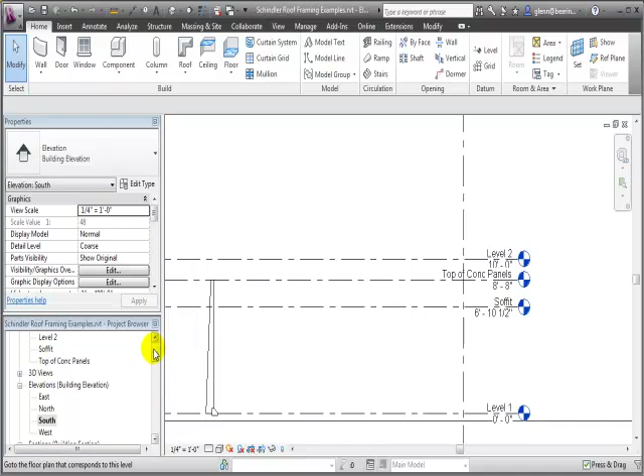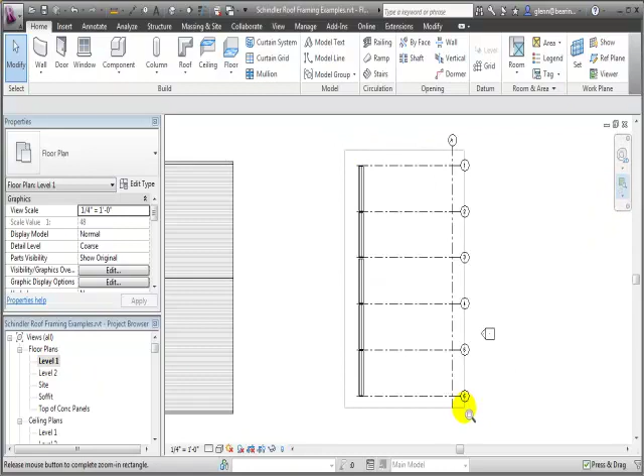If I switch back over to Revit and start placing some things, let's pop out to 3D for a second so you can see what we set up. We have a series of those Kings Road wall panels hanging out, waiting for us to go through and start putting some framing in there. If I start with that system and go to level 1, you'll see I've set up some grids that are matching the breaks in the wall panels, which would probably be a very typical thing for Schindler to have done - he really liked his grids.

To go through and create some of those basic beam elements, we could do things like put in some structural columns. For those structural columns, we don't have, by default, wood frame ones loaded - these are wide flange columns, steel columns. So what we'd probably have to do is load in some families.

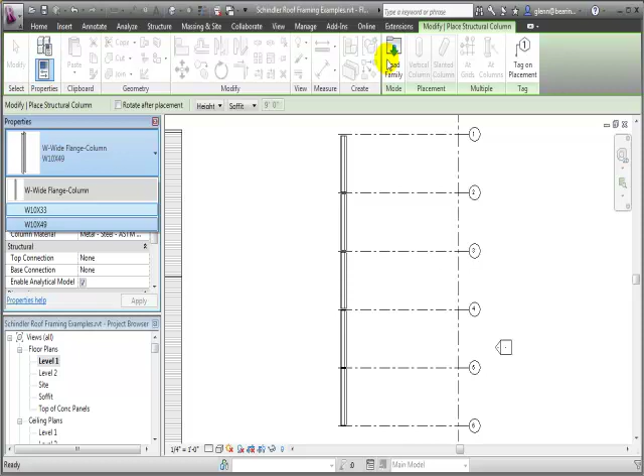If we go to the structural folder, and go to columns and open wood, we'll find some dimensional lumber. If we open that up, we can go through and choose some specific sizes we're interested in. In this case, we'll go for 3x8s, and maybe some 2x8s. Just collect as many different sizes as you think you're going to need.

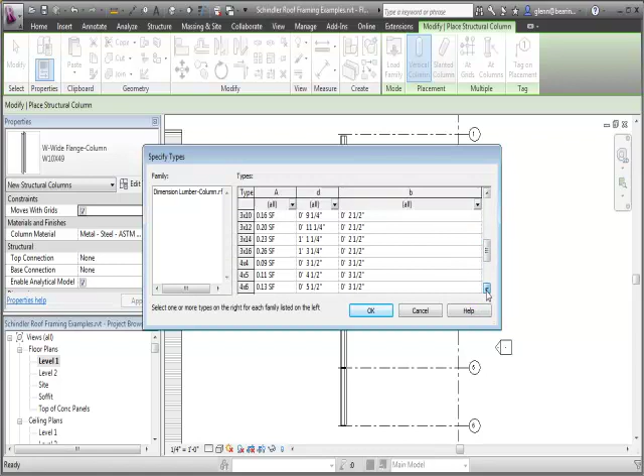I'll warn you about these. These are dimensional lumber sizes. What's going to happen is the lumber that Schindler was using looks like he was calling out explicit sizes as opposed to nominal sizes, so we might need to do a little bit of adjustment. We have these different column sizes available. If I open up the 3x8, you'll see it actually isn't 3x8 - it's really a more modern standard of nominal sizes.

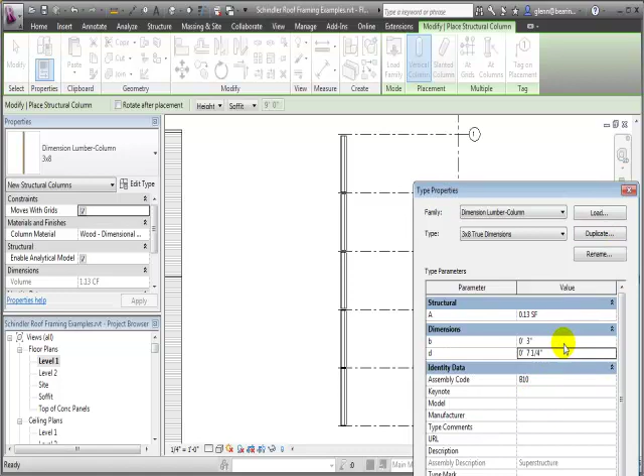So what I'll do is create a new one. I'm just going to call it 3x8 true dimensions, just so I could match what he was using at his time. So 0 foot 3 by 0 foot 8.

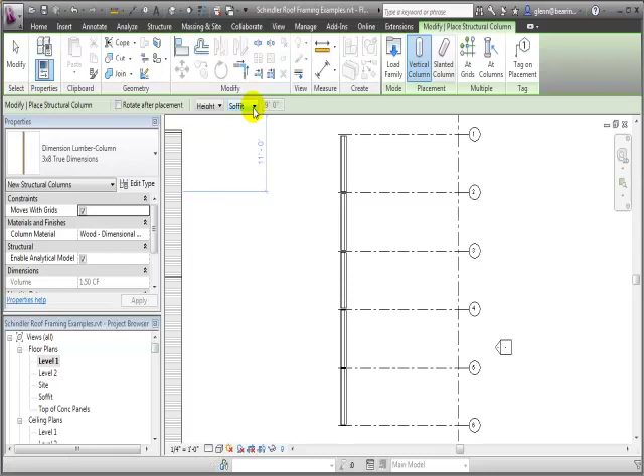Okay, we'll go ahead and place some of those different columns. Let's take a look at how you do that. We're going to place them from the bottom up, relative to level 1. It's going to fight with me a little bit over how high I can make them. Maybe I'll leave them to soffit right now and change that a little bit later.

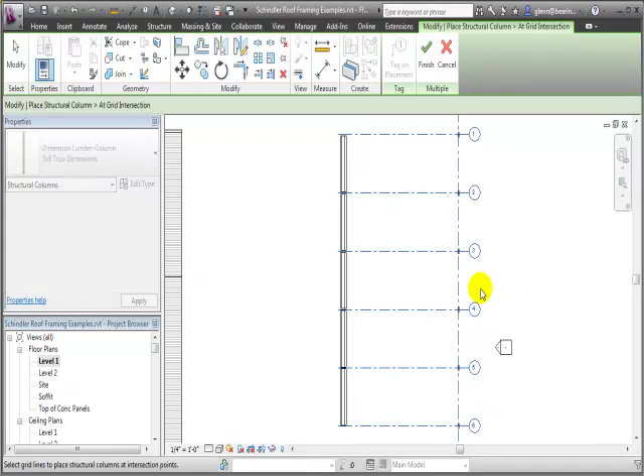That's going to be fine. I'm going to put them at the grid intersection, so I can just choose some grids, selecting them, and control clicking to select those. You'll see it's actually rotated them in the wrong direction. If I hit the space bar, it'll rotate them around to the right direction. And I can say finish those. Okay, that'll at least get those in place.

Now, note that they're a little bit off in terms of their heights right now, because it wouldn't let me adjust it as I was putting them in at first. Let me see if I can get it in here now. I'm going to put in an offset of 6 relative to level 1.

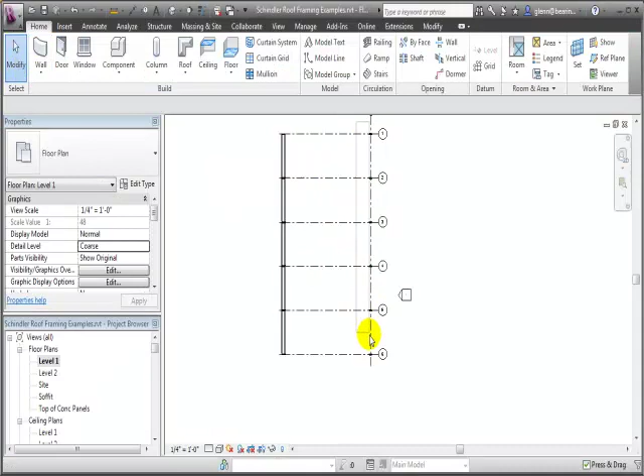Okay, I think that's going to match the detail we saw in the drawing - so about 6 feet. Oh, I take that back, 6 foot 3. Let's go back and fix that. So again, I'll choose all those, and I'll say that you are all 6 foot 3 off the floor.

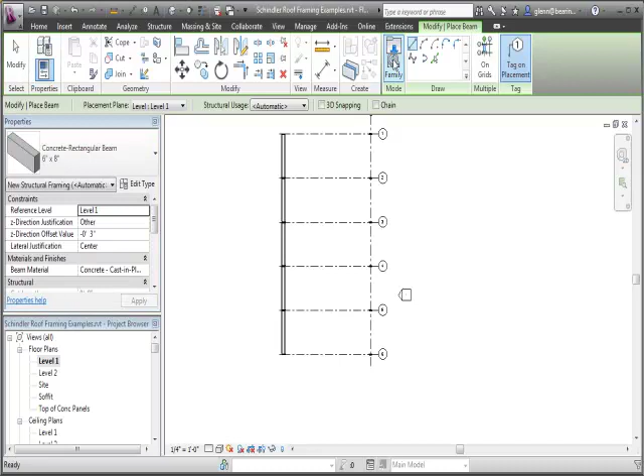Okay, now we need some beams running across in the other direction. To get that, I'll go again to the Structure tab and choose the Beam tool. In the Beam tool, you'll see we have some standard beams loaded, but not the ones we want. We're going to load in dimensional lumber and make it a true 3x8.

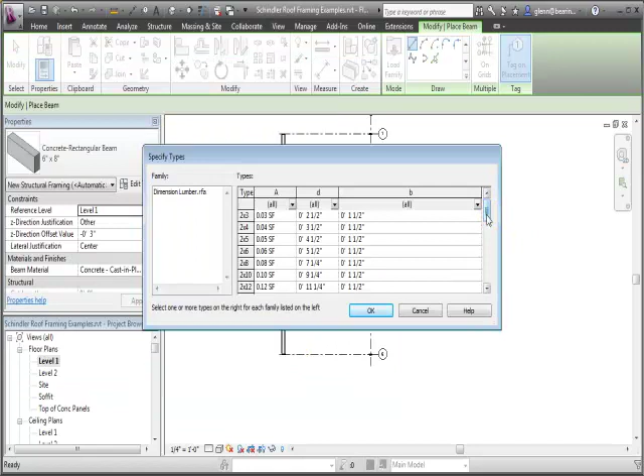So we'll say structural, framing, wood, dimensional lumber, and I can now go through and choose those 3x8s. Again, I'm going to adjust it to be a true 3x8, so I'll duplicate that - true dimensions - and change it to 0, 3, 0, 8.

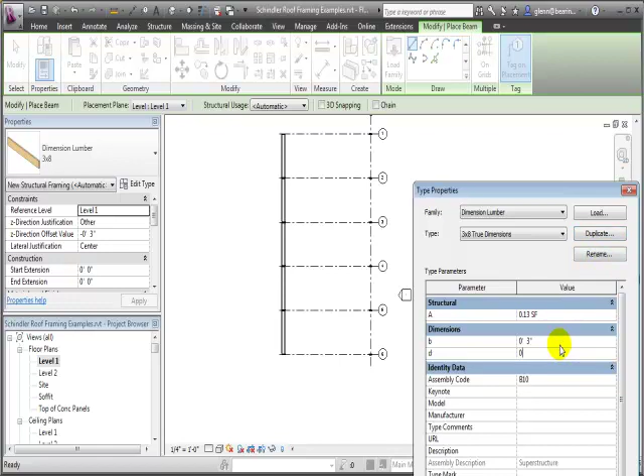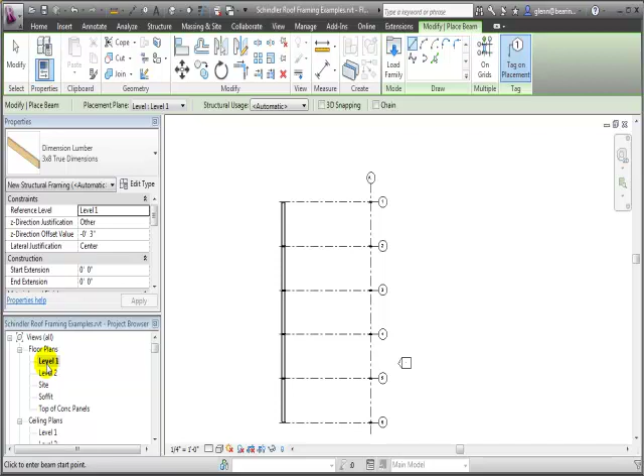As I'm placing beams, beams are always a little bit tricky to place, so watch out for this, because what typically happens is when you place beams, you're actually placing them above your head, since they're typically above the level of 4 feet where the cutting plane happens. So let's shift around a little bit. Rather than looking at the floor plan view, I'm actually going to look at the ceiling plan for level 1. That way I'll be looking up instead.

I'll choose beams. I'm going to say that I'm going to put these at - let me go ahead, there's a number of ways I could dimension this. If I say relative to level 1, what I'm going to do is offset the top of them. No, the tops aren't at level 1. Let me say other - since 6 foot 3 was the bottom, 6 foot 11 will be the top. Let's try that and see how that works. We'll say OK to that.

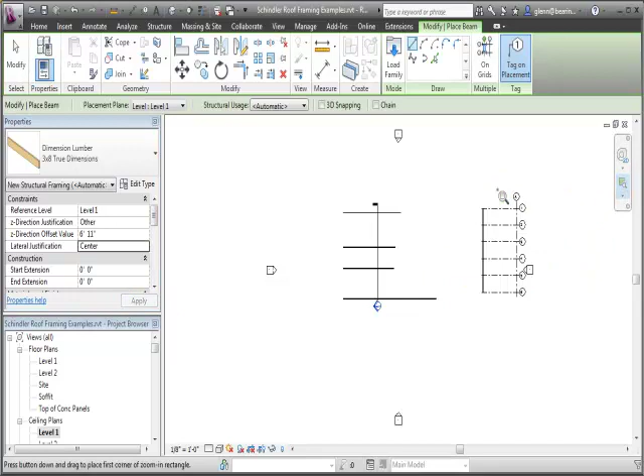And then what I'm going to do is just draw something that goes from here to here. Notice it's again going to warn me that we can't see those elements. That could be for a number of reasons. As we're trying to put beams in, we do have to turn the coarseness up from coarse to a finer level of detail to see them. But that's not what's causing it in this case.

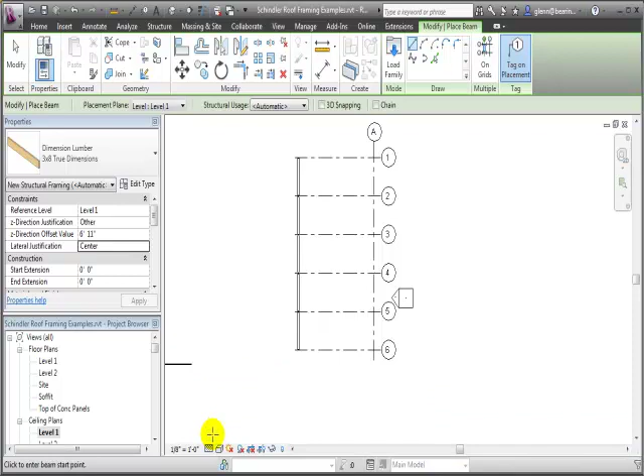I think what's probably happening here - if I look at visibility graphics, you'll find that in most architectural drawings, the structural framing is turned off. So I might have to turn that on to be able to see the beams. Still not seeing them, so let's take a look in 3D and see if I can see what's going on. Looks like they are showing up there.

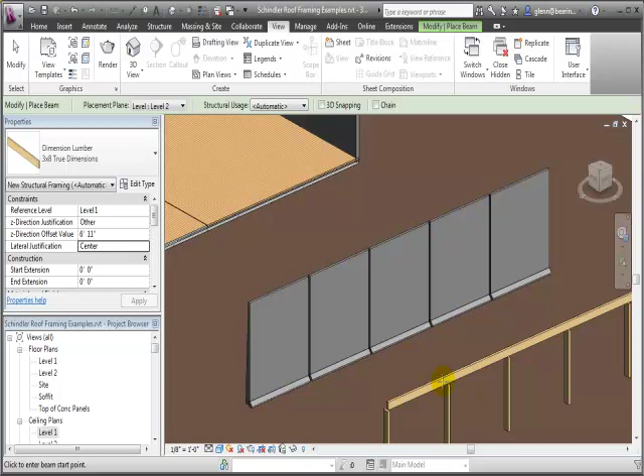And if I look at them in section, I think they're showing up in there. Again, I need to turn up the level of detail. That's not looking too bad in terms of what's going on.

Some of the different things we want to do just to make sure we get these all adjusted. One is we want to go through and, if we're going to follow his detail, align - if you look at the back of the columns, okay, with the beam, it's actually lining up more on the back side. So we could say align, that'll be AL for align, or let me try the modify tool and see if I can choose that beam.

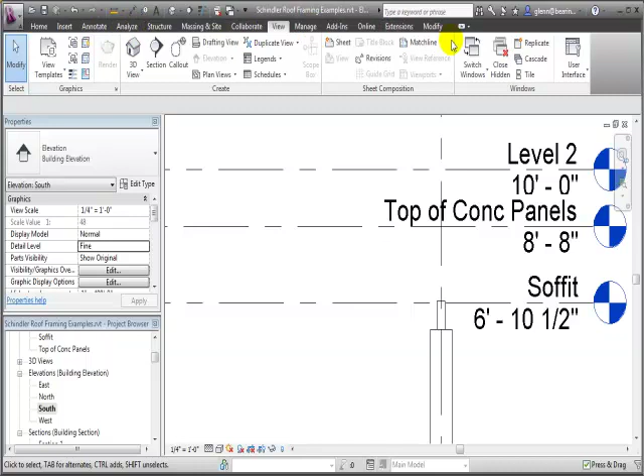And again, we will do an alignment right there. Choose this, bring those back, let's lock those in place. That's not looking too bad.

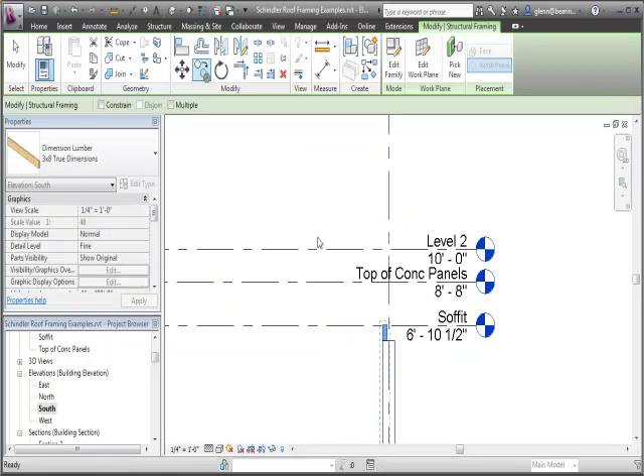Now for this next one, let's go ahead and try just copying that up. Let me see if that'll work. I'll copy this, take it on up. That was actually pretty easy.

Looks like I even got it about the right location, which is going to be the Z direction off it, so right at - it's 6'11". Well, I'm going to take that back. That's off the soffit level.

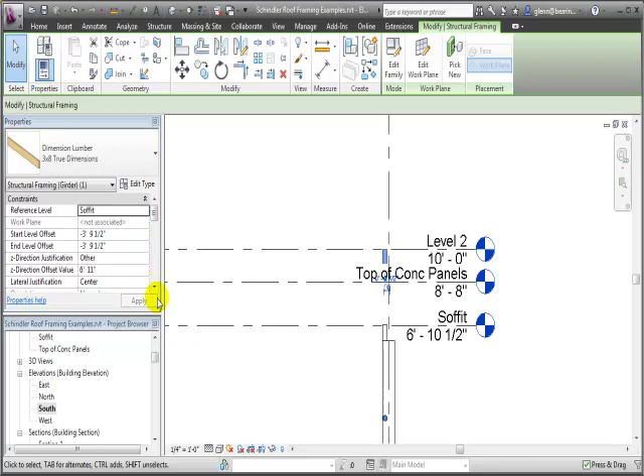Let's go ahead and, oh, there's a lot of ways we could reference this. Let me just say it's going to be - I believe it's level 2, was our roof here. We're just going to check to see what's going on over there. No, it's top of the concrete panels. That's what's actually going to be the top of our roof over here. So, top of concrete panels.

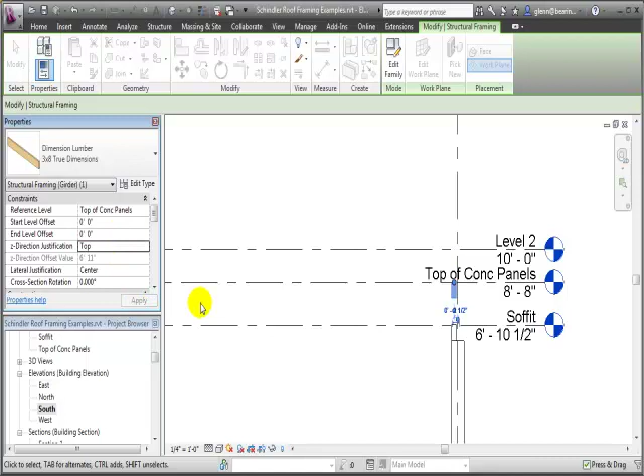And I'm going to say that the top of these beams is just - I'll change that offset. That's if we want to have the sloping. Let's see how that looks. Now that's actually looking pretty good.

Maybe I'll move that away so you can see the section a little bit better. Okay, we're actually doing pretty good now because we do want the beams that are in the roof to go ahead and line up with that top of the concrete panel. Let's go back to 3D.

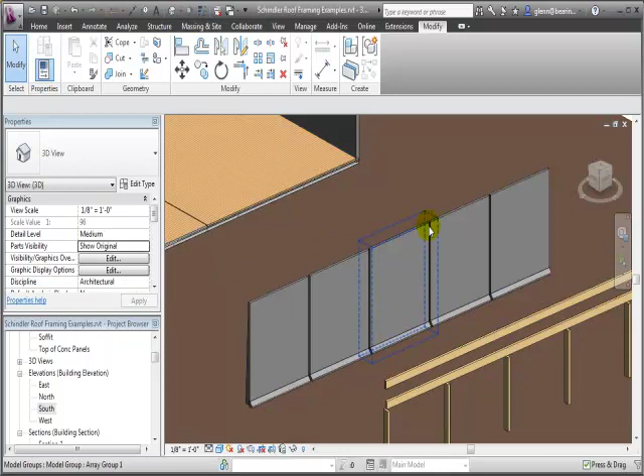So over on this side of the wall, though, we're going to want to do something a little bit different. If we go through and take a look at the beams, you'll see that they tie in at this side to this little bit of a ledger element, and I was guessing that was probably about a 1x8.

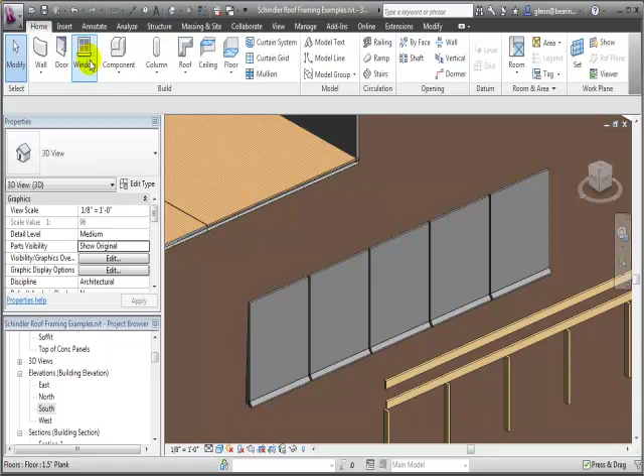So to model that, we could do something like, again, go to structural beams, structure in beams. In this case, I'm going to create something like a 1x8. Okay, that'll be 0'1" by 0'8". That's looking pretty good.

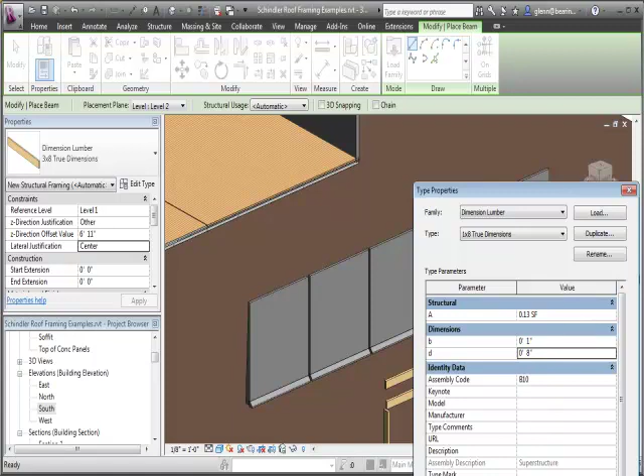Now in terms of placing that ledger, let's go ahead and try and use some 3D snapping to actually place it at the right level. What we want to do is actually place it at the top of the concrete panels, and the top of it will be at the top of those panels.

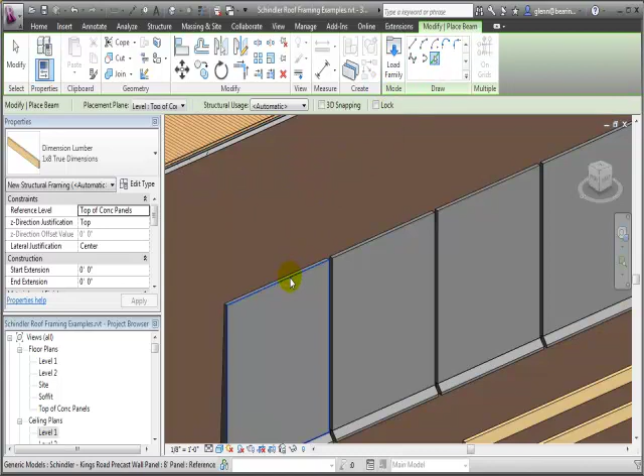So what we're going to do is just use the pick line, and I'll click right on - if you zoom on in - that inner edge, that's where I really want it to be. Let me orbit this around just a little bit so we can take a look. It looks like it's actually doing a good job. We can pan that a little bit too.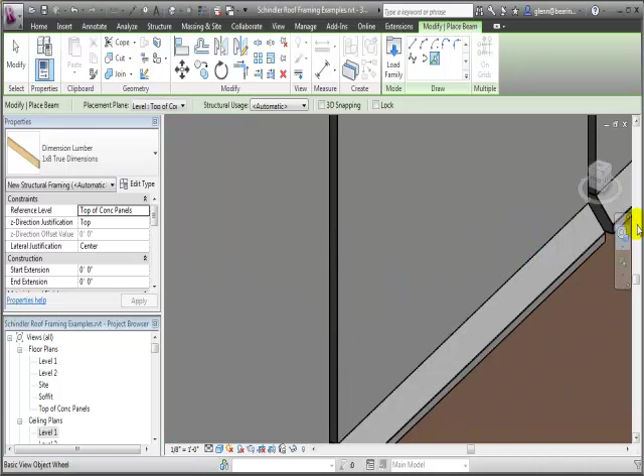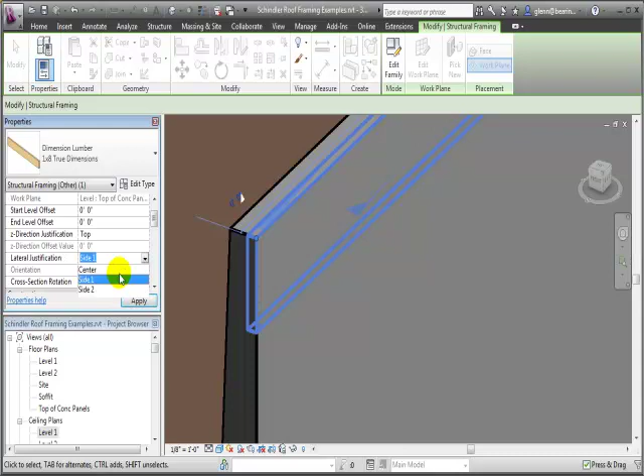Actually, this looks like it's recessed into the wall. That's not quite what we have in mind. So what I'll do is choose that, and you'll see that in addition to the Z-direction offset, you have this lateral justification, and we can decide really what side of the beam lines up with the line that we picked. It looks like it's going to be side 2. Okay, great. Now it's on the inside as opposed to the outside.

So having placed that one, we can actually just stretch that right along and get a ledger that's running across the entire distance of that wall, across all those different wall panels.

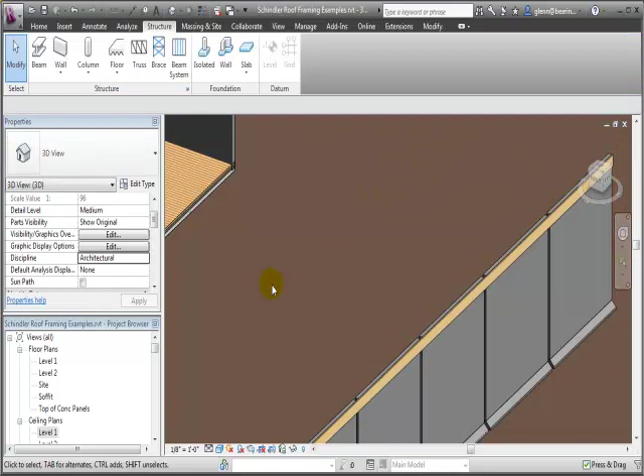Super! Okay, now that we have those two things, we're ready to start placing the beams that are cutting across in the other direction. Those are going to be beams also. These are going to be the 3x8 beams to the true dimension.

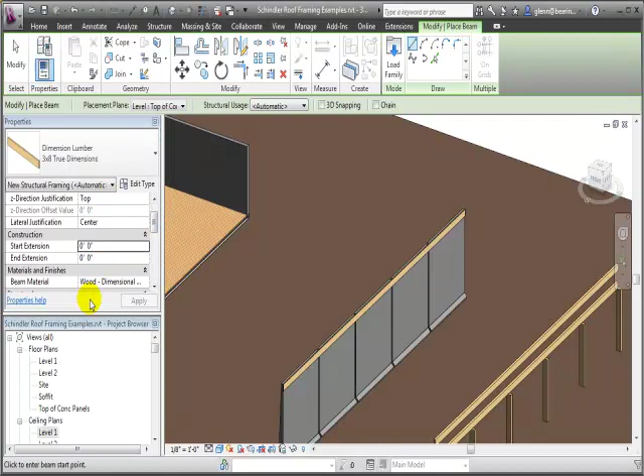Okay, let's again think about where they're going. They're going to be at the top of the concrete panels - that's the top level offset - so try and get the properties all set up. In fact, let me move this over here just so it's easier to see. So we'll get the top of them all set up, or the properties all set up, before we start placing them.

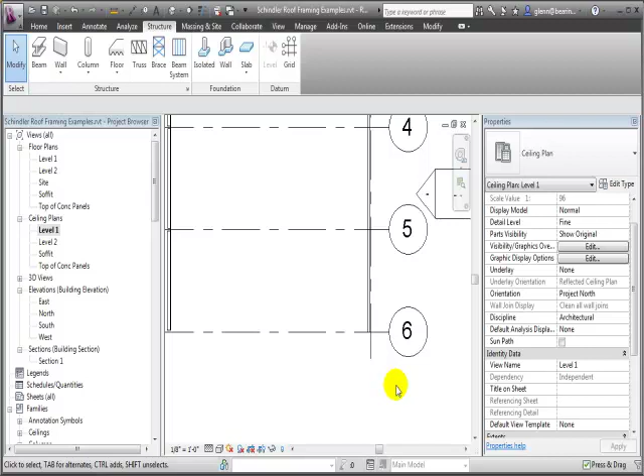Okay, once we have that in place, let's go through and place it in a number of different views. Let me go back to that ceiling plan view and see if we can do it that way so we're looking up as opposed to down. We'll go back to the beam tool.

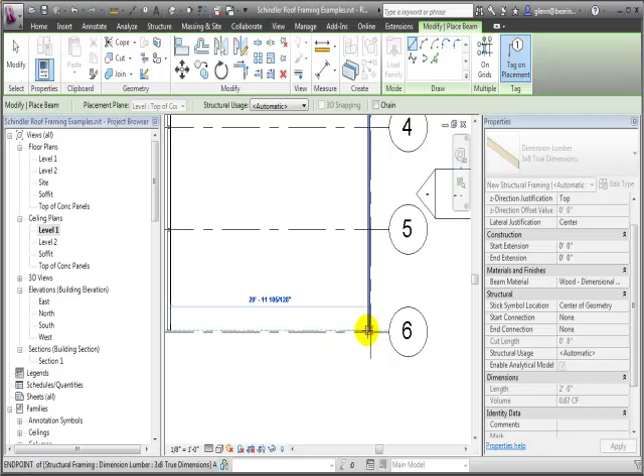Once again, being careful to choose the right placement plane. It's going to be top of the concrete panels, top of the beams at that level, centered. Let's see if we can place these. Okay, that's looking pretty good. Now let's confirm it in 3D, and that's actually looking pretty good over here.

Okay, what we want to do now is, although, well, they're a little bit long. Let's go ahead and fix that before we go ahead and copy these up.

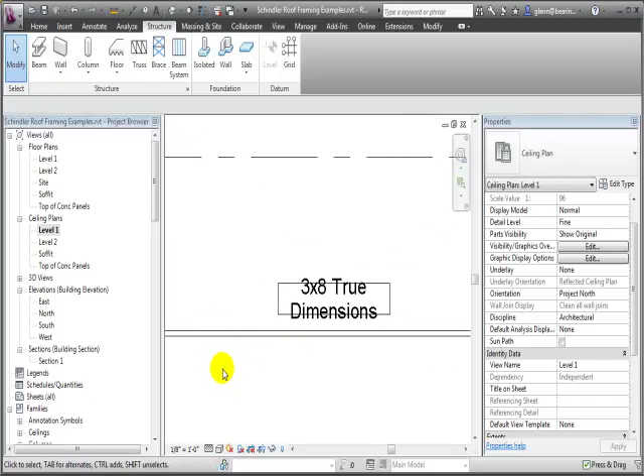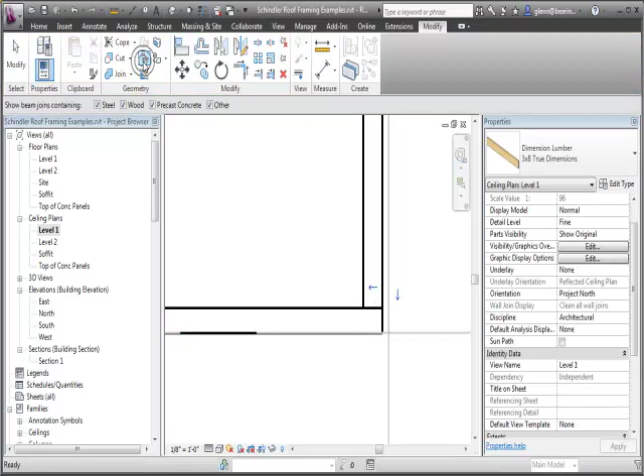I will say that in terms of the joins, we don't actually want them to join this way. We want them to join in the opposite direction, so let me see if I can adjust that. Beam joins are actually handled right here - that's wall joins, beam joins are right there, very close to it. I can adjust the directionality of how they want to cross, which is going to be the dominant element versus the subordinate element, so I can get that adjusted.

Let me do the same thing over here. I'm going to say that really this one pulls back and that one pulls down. Okay, now they're adjusted the way I like.

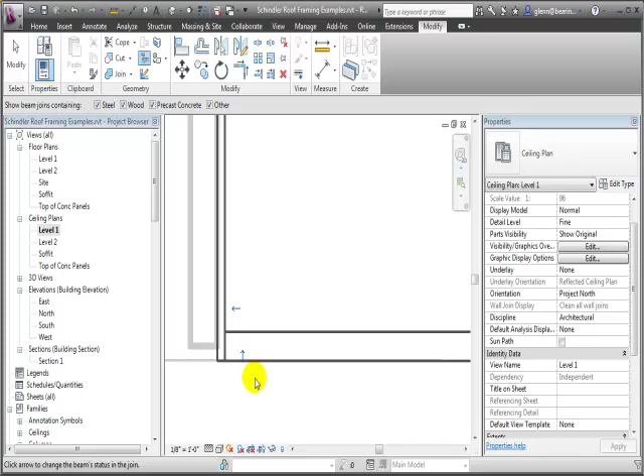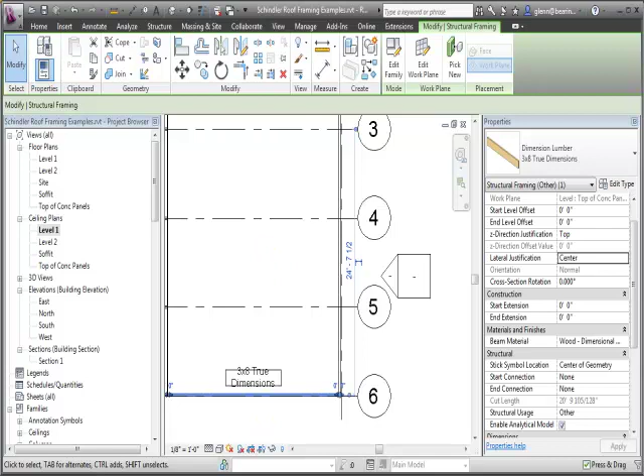Now that that's in place, let's escape. And we can take these, and what we're going to do is array them. Since we need to go through and basically create a bunch of them at 24 inches on center, I can go through and either array these or just copy them.

Arraying is often the easiest way to do that, so I'll choose the array tool. I will grab this, spread out 2 feet, since they're at 24 inches on center. Okay, then I can put in the number of them that I want. Oh, let's put in 10 of them.

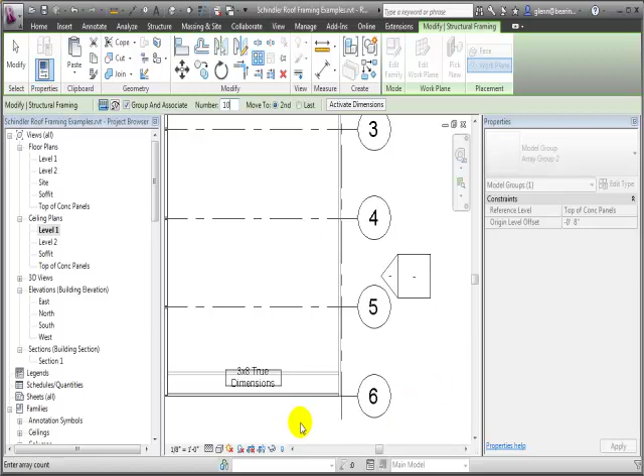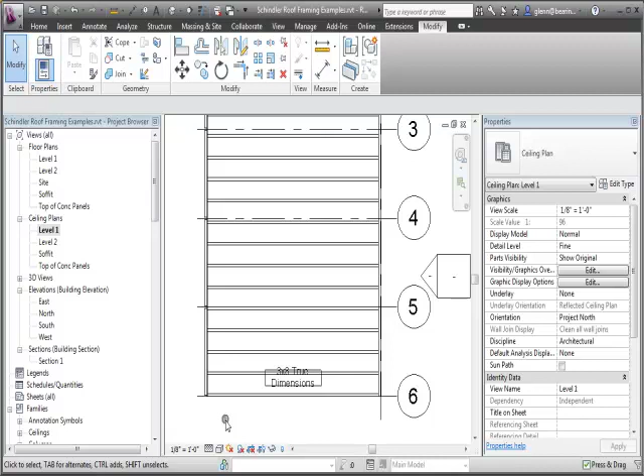I thought I got 10. Let's try again. It's off the screen there, but 10. There we go. Maybe we need more - let's try 18 of them. Okay, but that's how we go through and create very regularly spaced framing elements.

Let's go ahead and save that. There we have the basic system, and now we have the framing in place. What we're ready to do now is actually go ahead and start putting the roof surface on top of it.

For the roof surface, let's go back and look at our detail. We're looking at 1x8 planks. Here they're overhanging just a little bit; over here they're just right about to it, but we have a little bit of a fascia detail. So let's take a look at how we could create that.

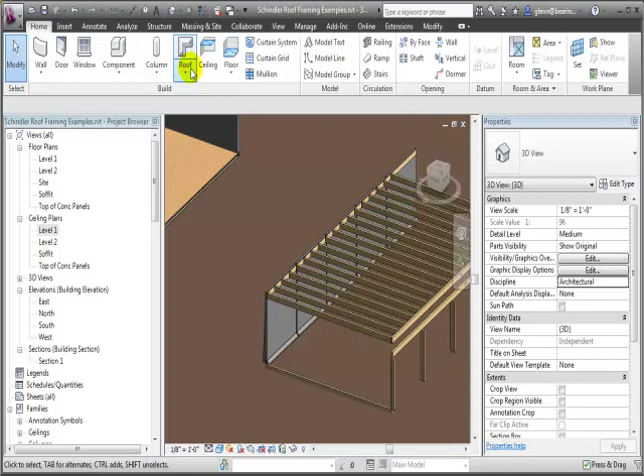To create the roof, it's going to be very much like creating the floor elements, where we have a multi-layer assembly. What we can do is choose the roof tool, roof by footprint, and start by creating a roof that has the right elements to it. There are a couple we could use as a starting point, but really just going to take one and duplicate it and see if we can come up with what we like.

I'm going to call this just 1x8 planks with tar and gravel. And what the structure is going to look like is something like this - let's say it's going to be 0, 1.5 for 1x8, or actually his dimensions probably, or not, excuse me, 0, 1.

We don't have a layer of sheathing on top of that, but then in terms of the actual asphalt, or the material on top of it, this is set up to be asphalt shingles, 1/4 inch thick. We can go through and change these materials to be something closer to what we want.

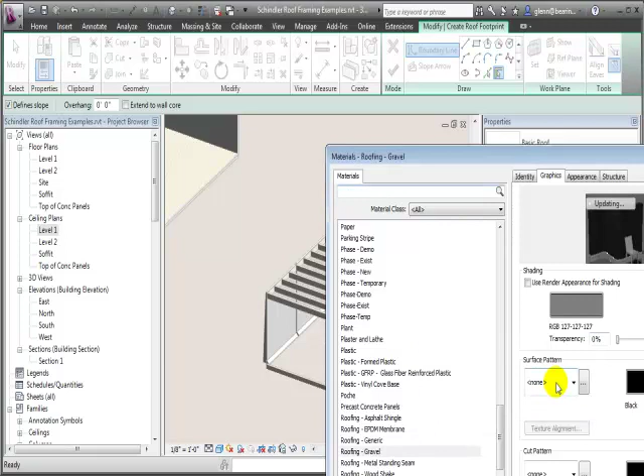Let's see what we have here in terms of roofing - membrane, let's just take that one, we'll duplicate it. We'll call it roofing gravel, and we can give that a nice surface pattern that would show up in a 3D view.

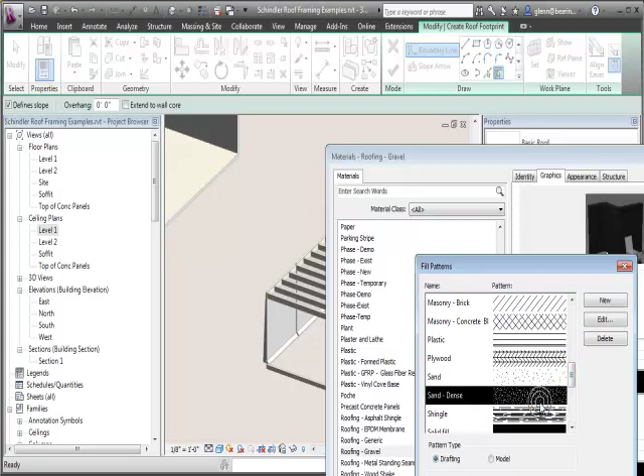Let's shift to a model-based category - that'll be probably a little bit better in terms of having something that looks grainy. And take that back, let's go back to drafting. Oh, there we go, I'll do something like the dense sand, something like that. Let me pull that up so you can see it.

And then over on this side for the structural wood, again, one of those ones where we just want - could be like floor planking. In this case, though, it's going to be the roof planking, so we can just name that.

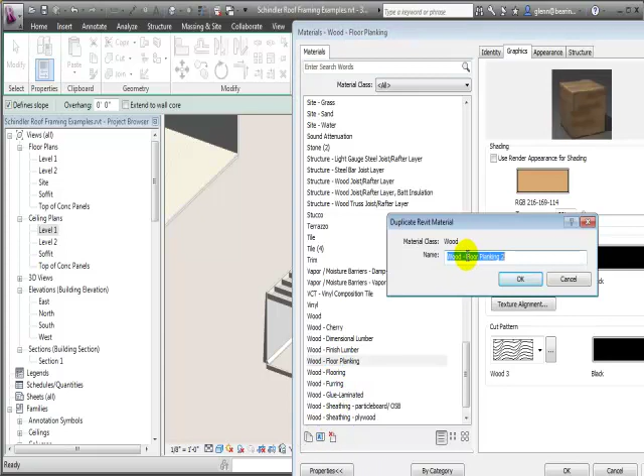Creating separate materials is going to give us the ability to change the visual appearance if we need to, between the roof and the floor. So you might as well get that set up now so you're ready for it in the future.

Great, okay, we have something that's about the right level. Now we're ready to place it. The important thing to keep in mind as we're placing roofs is they actually sort of sit on top, as opposed to floors which are below the level where you place them. So roofs always sit on top.

Let's think about how that's going to relate to our detail. So it looks like if the top of the concrete walls, the top of the concrete panels, was right here, it looks like the planks actually just go right on top and sort of extend beyond.

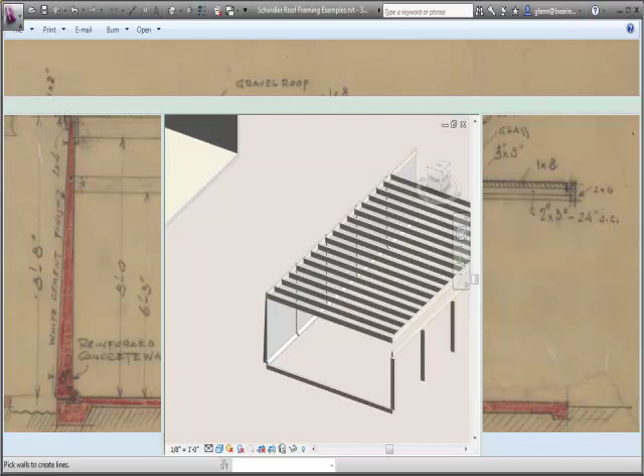So what we can do is, kind of in the same sense, let me do it about... can I see that at the top of the concrete panels? I can't exactly. What I really want to do is be a little bit higher still. Maybe I'll do it in the ceiling plan, so I can see them in there.

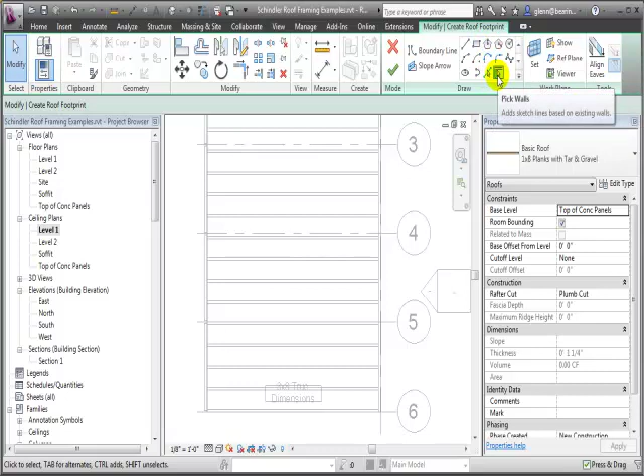I'm looking up now, so what I'm going to do is just draw that footprint, and I could do that by picking lines or picking walls, whatever is necessary. In this case, let me just pick some lines. I'm going to pick it to the outside of that one.

I'll pick it to the outside of that one. I know it's going to actually extend a little bit further. Relative to this wall over here, we have the issue of how far out it extends beyond the edge. And it looks like it does extend a little bit. There's actually a little piece of trim in there that's filling in the gap. Maybe extend that a few inches beyond.

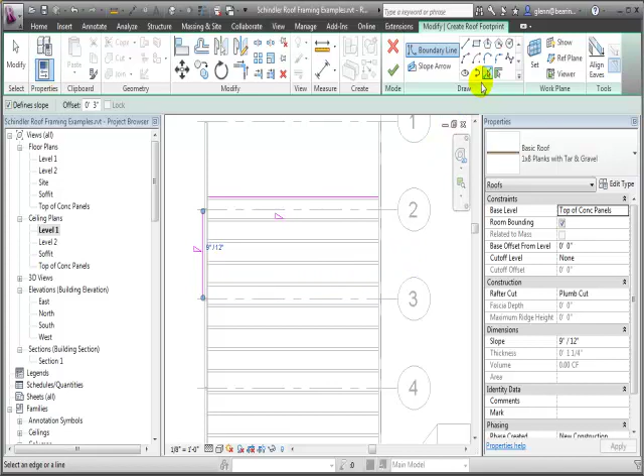So I could say over here, let's do an offset of maybe... let me extend it about 3 inches beyond on this side. And on this side, I think it's actually going to be just about even with the edge of the beam, which actually happens to be almost exactly right on the grid line too.

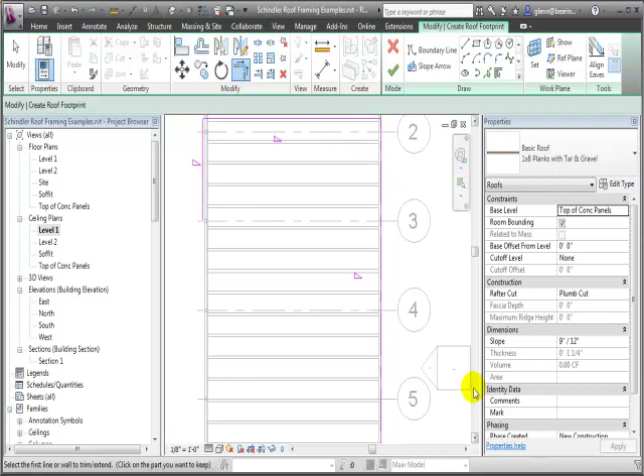Okay, now I've set 4 lines in place. What I want to do now, rather than trying to gather all the surfaces, is use the trim tool to just define that with only 4 lines. That'll be a little bit neater in the long run. So rather than trying to select every individual piece, which sometimes makes it hard to get a continuous boundary, just use the trim tool if you can to close that up.

Final thing will be, let's go ahead, grab all those and say they don't have a slope to them. Finish that up. Let's take a look in section.

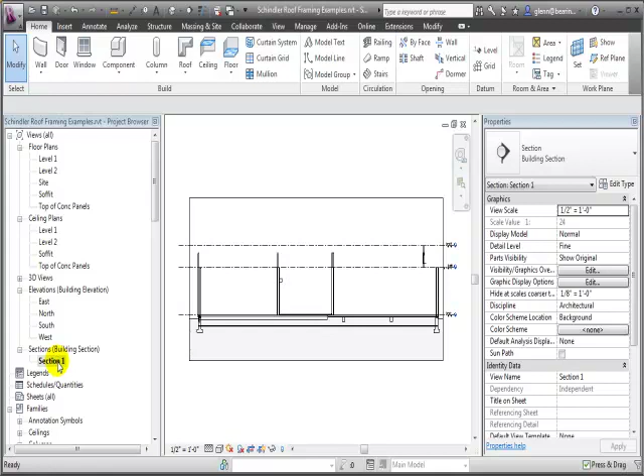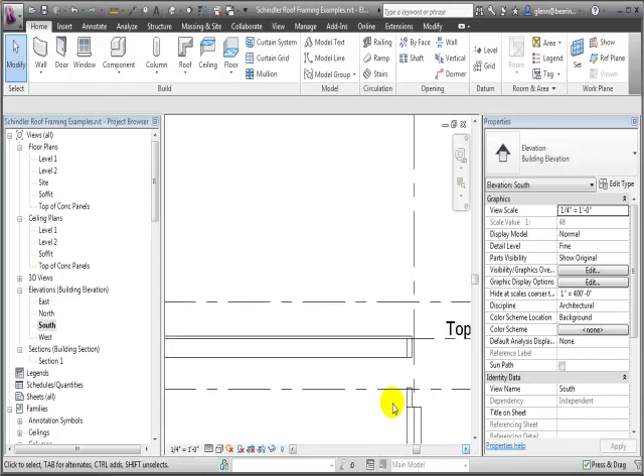Looks like I may have them in the wrong location. Let's take a look, see what's going on here. Oh, I'm looking at the wrong section basically. Let's come over here. That's looking a little bit better. You can sort of see those things in place. That's looking pretty good, those are actually looking not too bad right now.

You might have noticed there's the tar and gravel on top. That's looking pretty good. But in the ceiling plan, we have this issue where it looks like my plank direction is running almost in the opposite direction of the way I would like it to be. I'm just going to shade that so you see that.

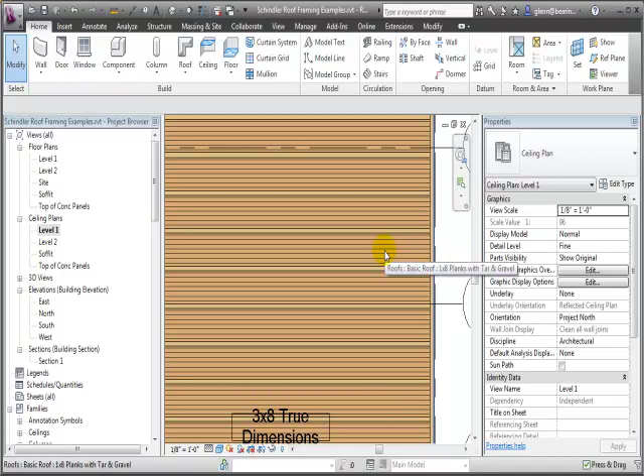What you can do is tab and actually just grab one of the pattern lines, then rotate that. I know it sounds a little bit counterintuitive, but it will rotate the pattern, shift it 90 degrees, and that is very similar to what you need. It's also going to be very similar to what you want to have happen just in the...

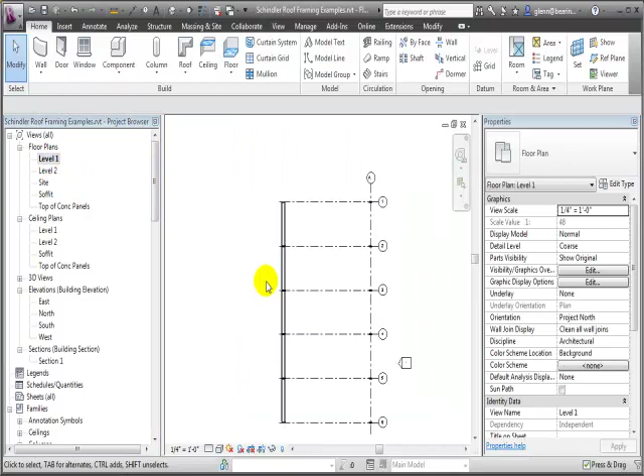Let me go ahead and set this up like in a perspective view, so I'll put a camera in there just so we can see. That's one of the reasons for modeling it so carefully, is that we can go ahead and take a look at that. And that's not looking too bad.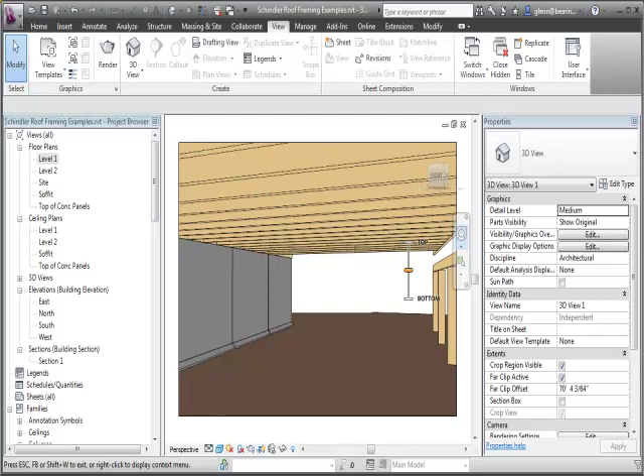Say consistent colors, maybe even here. I'm going to move down a little bit. It's kind of funny, it's such a low roof, it's hard to see the effect. That's the architectural effect we had in mind, and that's actually very consistent for a lot of the Schindler houses, as well as a lot of homes. Eichler homes, a lot of homes got built in the sort of post and beam with a plank style. And that's just kind of a very appealing look.

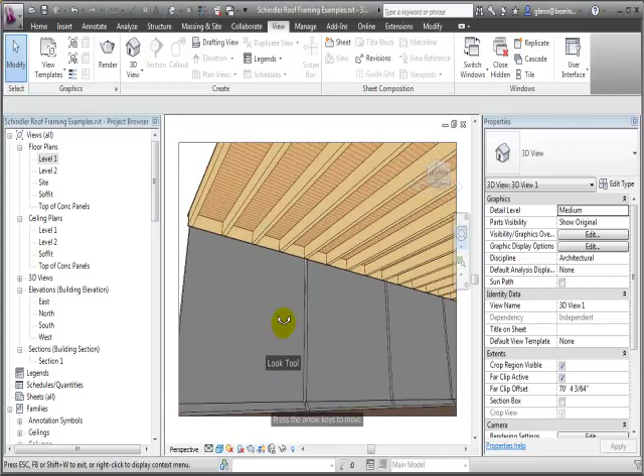Now to complete our model, we should go ahead and incorporate one other small detail. There's actually a little bit of what I call a fascia that's around the edge of the roof. Let's take a look at what that looks like.

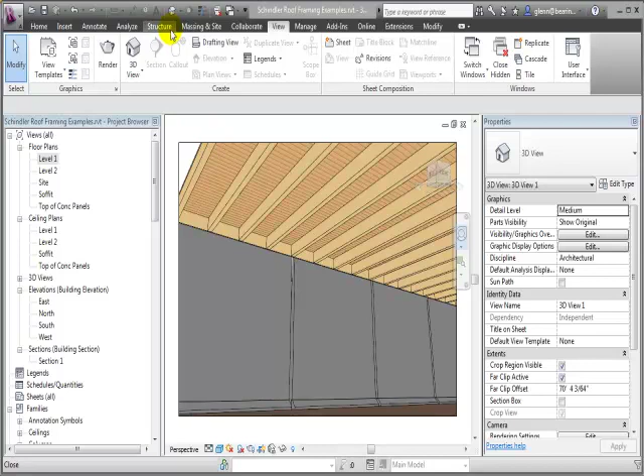So let's talk about how you can model that. If we go back over here and go out to a 3D view from the outside, here's our basic roof, and let me orbit it around. You can see this raw edge is what we're trying to avoid right here. It's just a small edge right now, and we'd like to fatten that up so it has a little more architectural prominence.

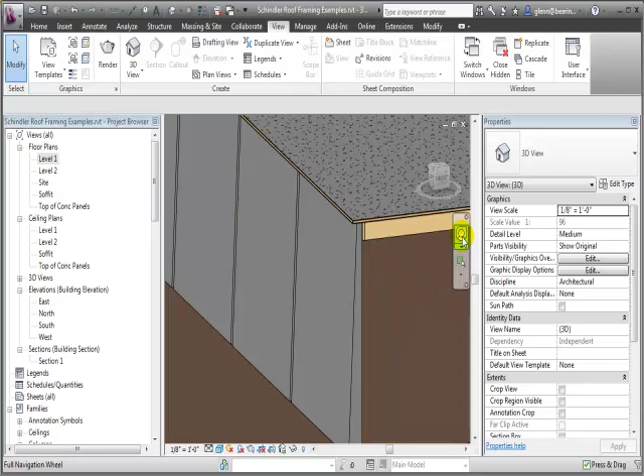So what we're going to do is add something else in that's a roof feature called a fascia. Fascias are pretty straightforward. We had baseboards and other types of sweeps, and this is going to work the same way. They have some fascia profiles like a 1x12.

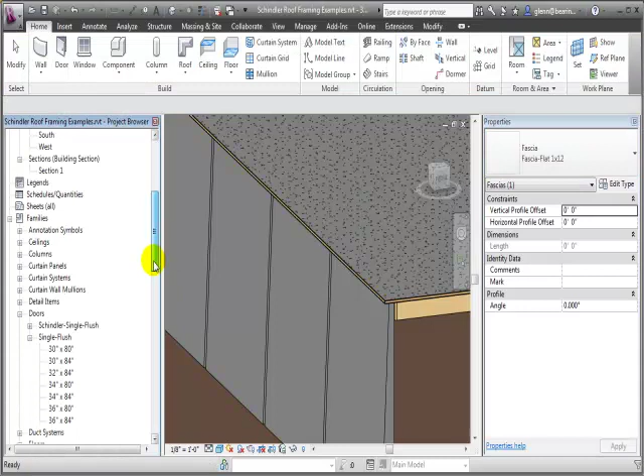That's kind of not exactly what we have in mind. We had more the idea of like a 1x4. So how we can make that happen is go on down to the profiles. It should start looking familiar now. In the profiles there's fascia. Well, looks like we even have a 1x4, so we don't have to create a new type or a new profile. We will go through and create a new fascia type.

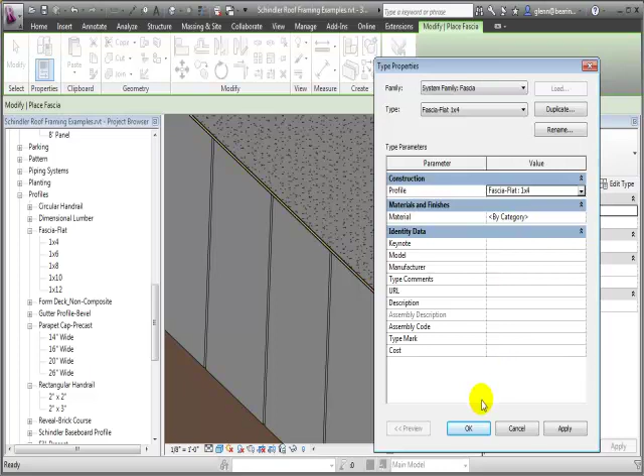To do that, we'll say roof fascia. I'll edit this existing type and make it a 1x4 fascia instead. The big thing we have to do is just change the profile. We could give it a material if we want to. Say OK, and now we're going to go through and place it.

To place it, what I really need to do is just click on the line, kind of like what I did with that ledger. I'll just click on this line. Okay, that placed the fascia there.

Now if the fascia is not exactly where we want it to be, we can give it a little bit of horizontal offset. That's what he did. Let's call it maybe 2 inches off. That looks a little too severe. Maybe only about 1 inch off.

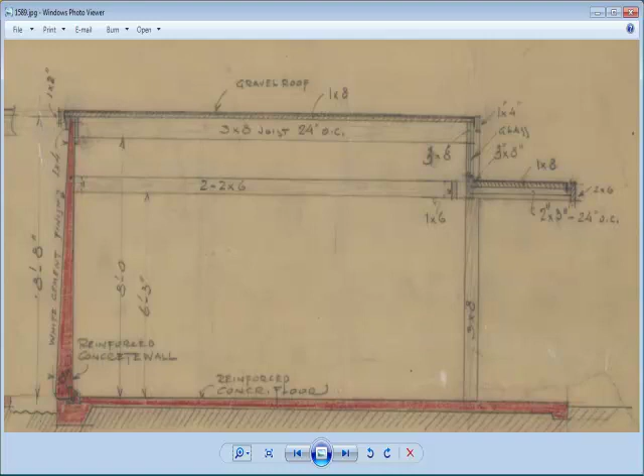We could also give it a vertical offset. Let's check this out. In his detail, looks like he's sort of about the top coming down. In the Schindler frame, I think it's a little different - here it's popping up instead. So really whatever is appropriate for your house.

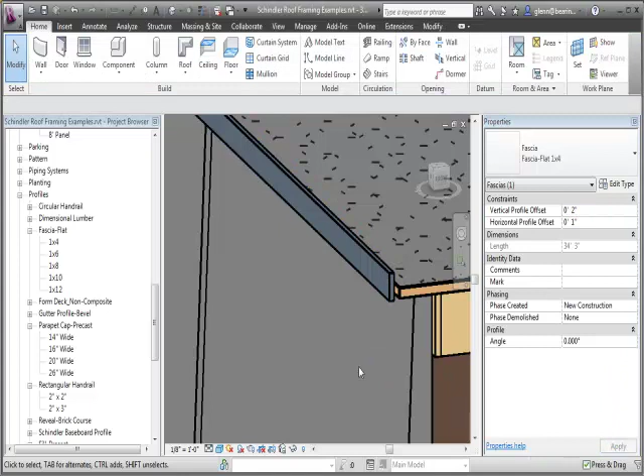You can go ahead and give it a profile offset. Let's say maybe 3 inches, pop it up instead. That was a little too severe. Maybe 2. But that's giving us that thicker appearance and a pretty accurate model of how we did these kind of plank roofs over an open beam system.

So that's the first example. Next we're going to go ahead and take a look at how we can do something more like a little beach house, where we have joists but a sloping roof, and maybe even close off the joists on the bottom.

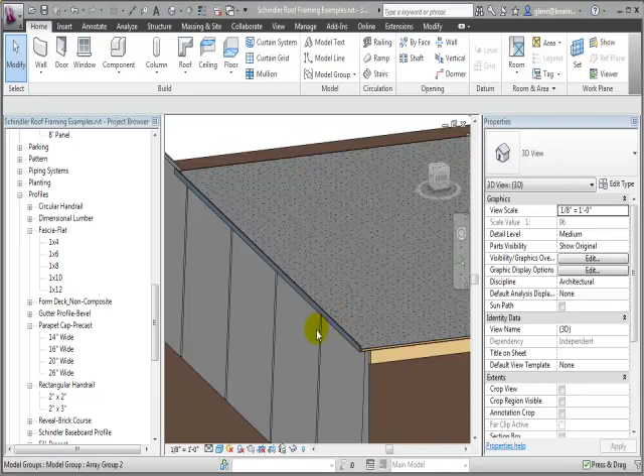Actually, before we jump over to that, let me show you one other variation, because the same basic notion can be used to model floors when we want to see the floor framing too. A really good example of that is actually in the Revit sample house. If you go to the sample house, available in all Revit installations, it looks something like that. Let me zoom that to fit.

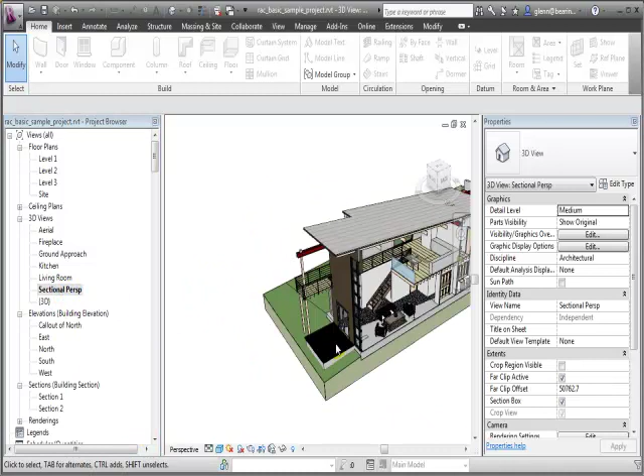And if you open up, there's a really good view that shows what I have in mind. It's called the sectional perspective. You can zoom in, and you'll see, if I pan that over a little bit, that here we have a very similar thing going on.

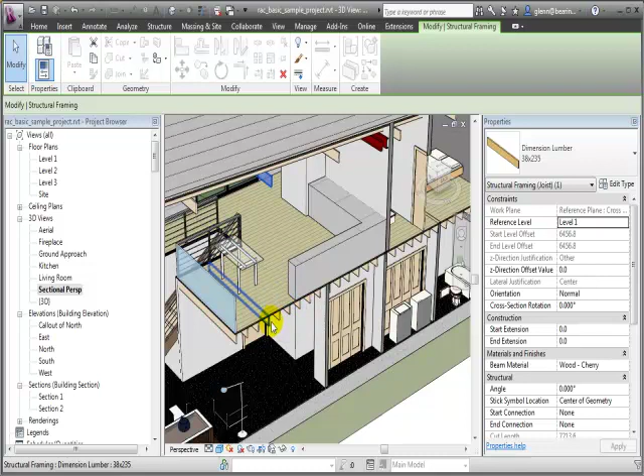We have this open beam system up here at the roof level, made up of just dimensional lumber pieces. These are all metric, that's why the sizes look a little odd, but at a regular spacing. Down here is the floor plane, and the same thing is happening - we have just the open joist elements and a very thin finished floor on top of that. And again, that's something you can use for your floors if you actually want to start showing that structural framing and illustrate the true structural skeleton of the house.